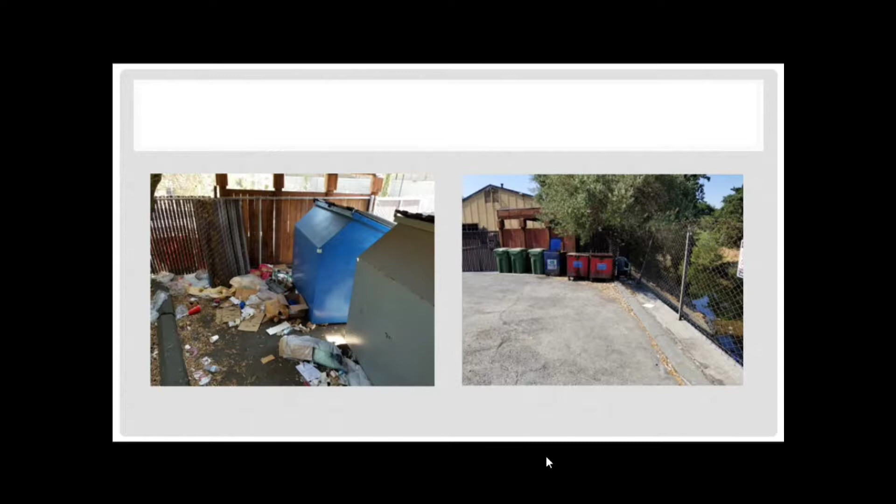These are things we see as we try to get projects through the process that we'd like to do a better job of, mostly because it's a pain in the neck for the people who operate them and for the people who use them. I imagine there's a pretty good reason this doesn't get much attention - it's back of house, nobody hardly ever goes over there, and it's probably a pain to fit everything in and get it all out, so they just leave it where it's more convenient.

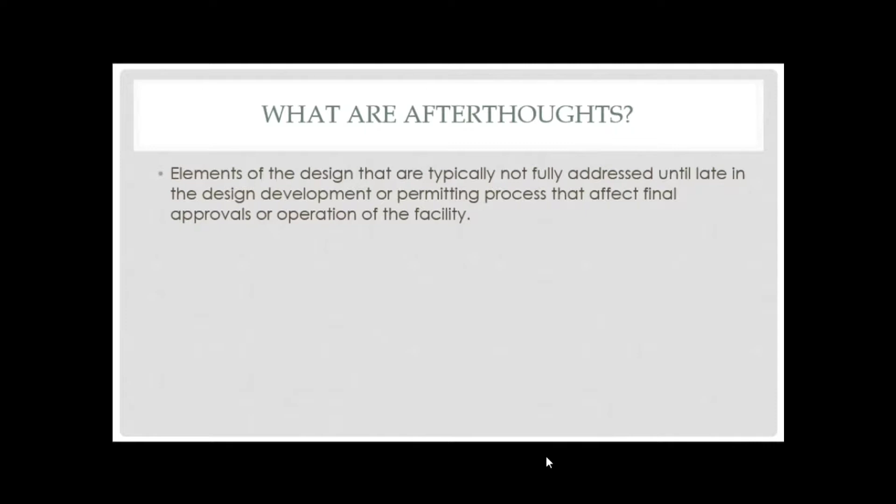So what are afterthoughts? They're elements of the design that aren't fully addressed until late in the design process. We figure we can work that out later. But ultimately, they affect the operation of the project.

All right, so what are we trying to avoid here? You'll see something later. We're in this together, but we miss stuff too, and we don't want to keep repeating the same mistakes.

And I think that's what the solid waste staff was telling us was, hey, we keep seeing the same problems over and over. We keep running into the same things where the truck drivers have to get out and move stuff around, or they can't push the carts around like they need to. But we also see where when we get back into that corner, we're being asked for an exception to the standards, or exception to code.

And we also are trying to avoid the undetermined impacts on the right-of-way, where you're lot line to lot line, and the only way to solve this thing is to put it in the street, or in the sidewalk area, or somewhere that's in the public right-of-way, or in an easement. And that can be difficult, if not impossible.

All right, so goals: share our experiences. Remember, we're all in this together. And at the end of the day, we all live with the results. If you come down and if you live and work and operate in downtown Walnut Creek, or in Walnut Creek in general, you're going to run into some of these things.

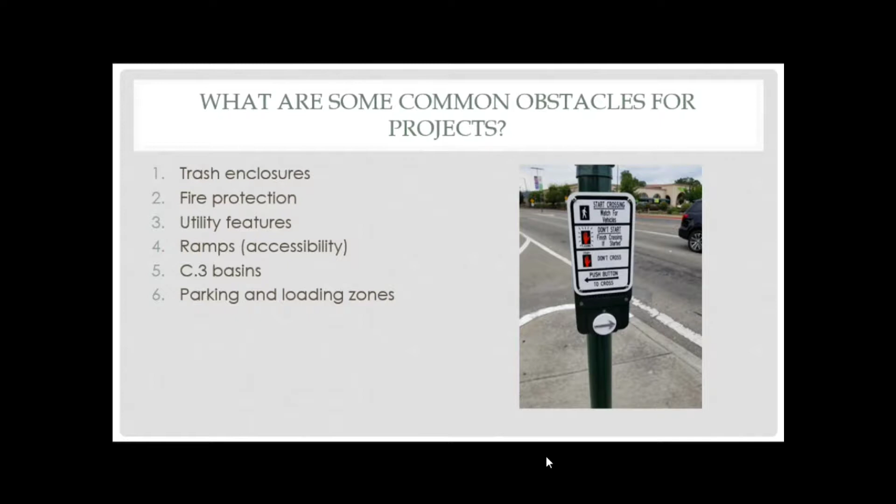And this is easily correctable. You just order a new sign. But we see these things, and we go, wow, could we have done this a little bit better, right? And if somebody's a visitor to the community, what do they see, right? So, but we also think about the safety of stuff too, right?

So, trash enclosures. The biggest thing here is show us that you plan for it, that it's something that's going to work, that it's big enough, that it meets the number of tenants that you have. It's not just one little box where it's got one little trash enclosure. It only handles garbage. It doesn't handle all three waste streams.

So how many of you know that by law you have to cover all three waste streams? Yeah, right? So you have to cover garbage, recycling, and green or the compost waste, right? That means that some of those bins can get a little bit smaller, gives some businesses some flexibility. But it also means that you have to be able to fit 3 bins streams worth of stuff in.

And if you've got a multi-tenant facility, or your multifamily plus retail on the bottom, you have to count for those different streams. And often what we see is this sizing of the trash room and the trash enclosure, because it needs to be so big, eats up so much rentable square footage. It's the last thing anybody wants to deal with, and they really don't want to pay for it. We get it. And they're expensive if you have to build one outside.

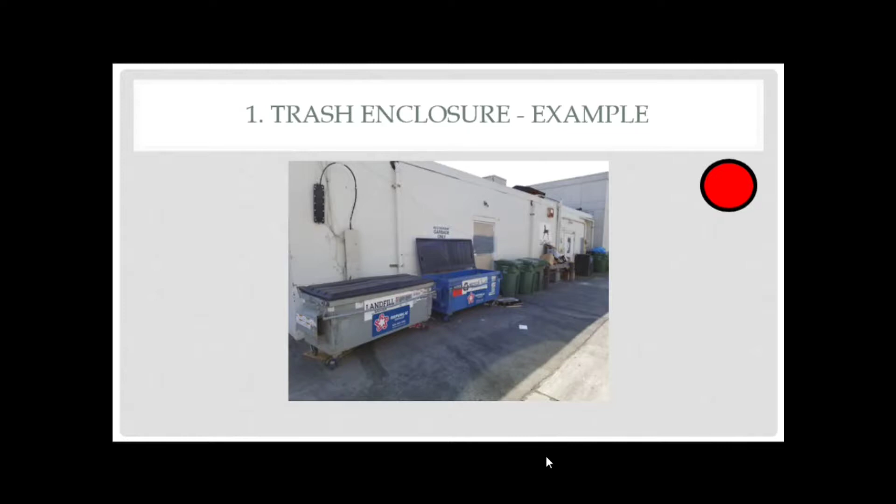So this one here is a restaurant. It's got no trash enclosure. They're backed up against some public right-of-way, but this is a challenge for those businesses and the owner with this facility. How do you deal with this much garbage? Restaurants generate the most garbage of any waste stream we looked at, period, and they generate it quickly. I can tell you more about that later.

All right, here's the one I showed you. The yellow one - at least they have a trash enclosure.

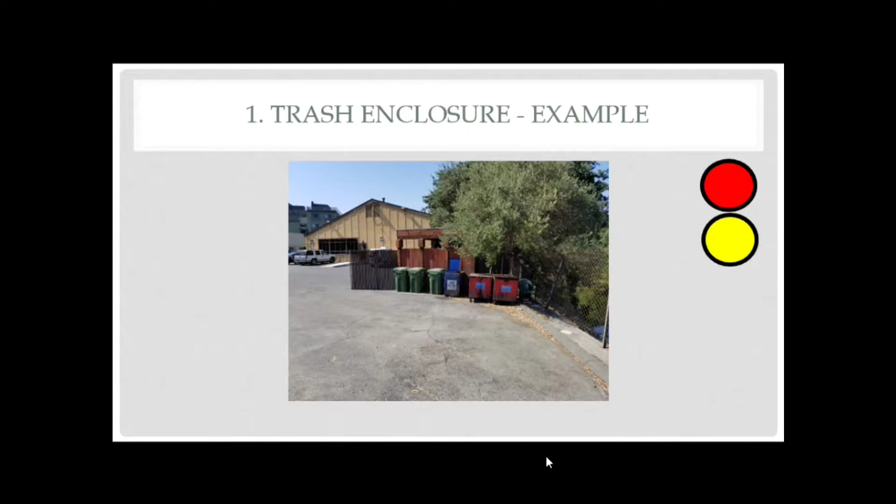All right, what do you see with this one? This is a new one. Yeah, they're probably not using it. There's a couple other things in there. Anybody got anything else? Access to it, right?

So if you can see right there, there's a little bit of a curb to that parking stall, and then there's a curb here, and that's the trash enclosure. And then there's this car - he's not even in a parking stall, he just pulled up. So how does the garbage truck get to that and roll that bin out and get it back up in there? That's difficult. That's next to impossible. That driver's going to dump that thing and drive off.

And he's going to leave it for the building owner and the operations folks for whatever business that belongs to, to deal with. And guess what - that person isn't either big enough or inclined enough to push that thing all the way back in there. And when it's heavy and full, they're going to cart it down off the curb and get it out of there so the guy can come by and pick it up maybe two or three times a week. So when we look at stuff, we want you guys to consider, as you go through the projects, this kind of action.

And oh, by the way, this is blocked by a handicap stall. What if there's a car in there? Legit, you can't - how does the garbage truck get access to it? Hopefully it comes really early in the morning.

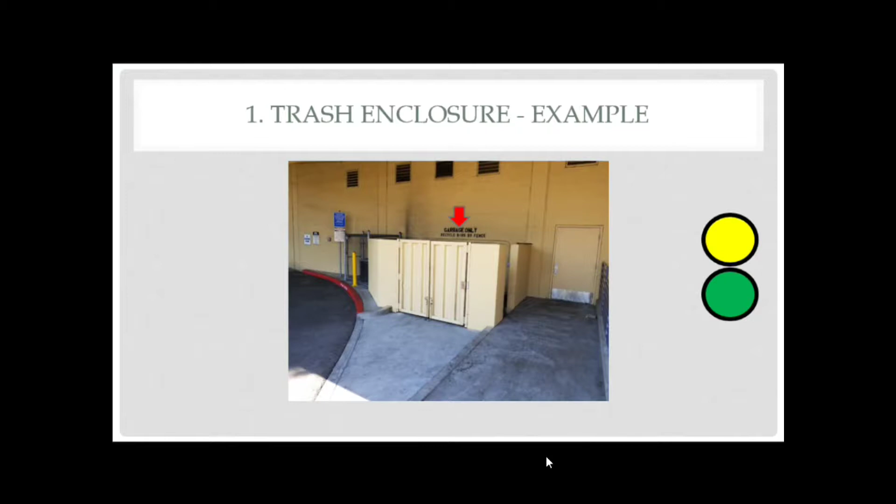They're just sitting out there. I didn't put that picture in here, because as soon as I did, you would know where it was. But the garbage enclosure is designed properly - it's underneath a cover, it's got metal doors, and it's non-combustible construction. The truck can get in and out of it, it can pull up to it. It's got some good features to it. It was nicely done, just not big enough.

So these are just some things that we notice, and we want to go, let's pay attention to that. So, on to fire protection devices.

This is something we see impacts the right-of-way a bunch, because through the initial planning phases, they don't get accounted for anywhere on the site. There's not enough room when you go lot line to lot line. And what people forget is that backflow preventer, the associated valves and elbows for the size of pipe for the fire line that goes into your building. If it's over a couple of stories, it gets to be 8, 10 inches around. That thing can get as big as 20 to 15 feet long and about 5 feet wide. And all of a sudden you don't have enough room from your building and across the sidewalk for that.

You're trying to stick it in the landscaping, and oh wait, that's in the right-of-way. We can't have that stuff underground out there because then it's in the way of the utilities and anything the city might need to do. So figuring that stuff out early, and at least allowing some room for it, is something that really has to get looked at early on in the process.

So what do we want you to pay attention to? Consider the access from the street for these things. They also have to get maintained. And landscaping features, if you stick too many trees around them, they can also be a problem, right?

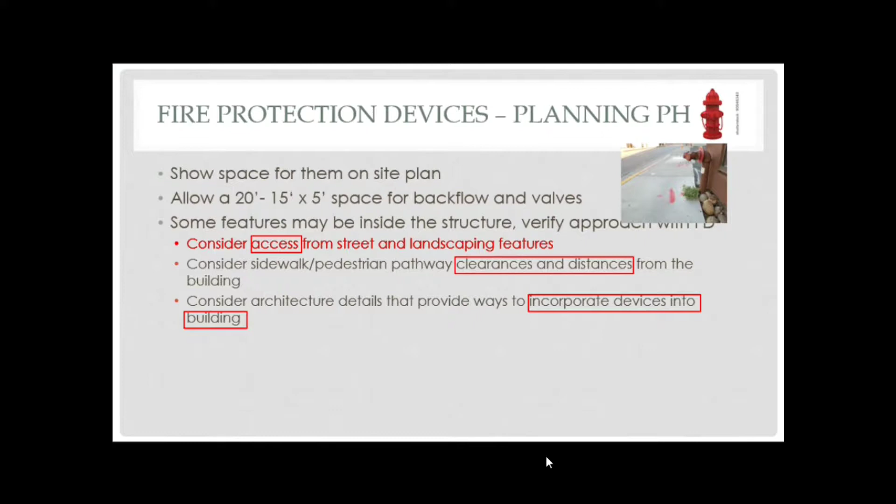And so these things stick out. You can see how that one's kind of sticking out past the sidewalk a little bit. Clearances and distances from the pedestrian pathway in the building is the other item here. And then incorporate the devices into the building where you can. There's some places where you can kind of tuck them in. You may see a little bit of that in here.

When we get into permitting, everything about permitting is going to be, give me some more detail. Show me more what we're talking about here. So I'm going to move around in the room because it's driving me crazy that I have to stand in one spot.

One of the things we've also found out is that the developer comes in and goes through the process with us through the entitlement phase. We get it all kind of worked out, and they go into the permits, they go to the fire department, and they go to the water district, and all of a sudden these things start to move around.

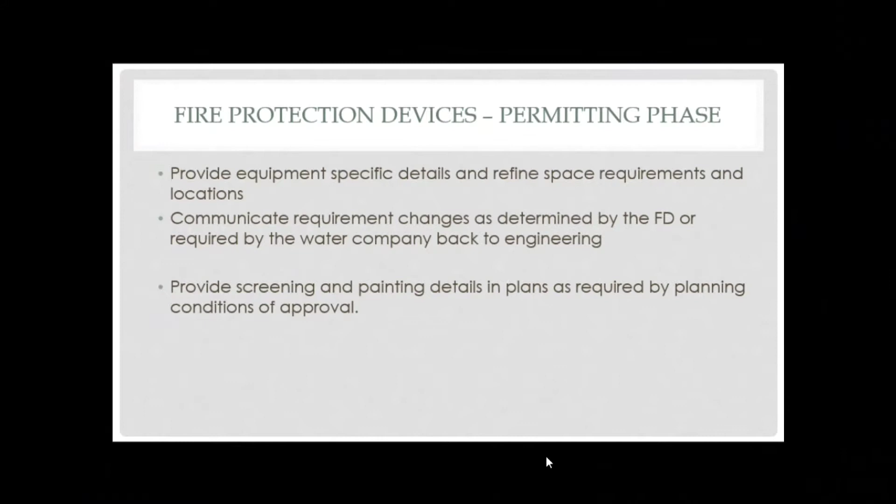And then for whatever reason, but then there's no room to put stuff back. And so communicate changes is that second item in there about when those things change. Let us know so we can figure out what the issues are. So we're not getting into construction, we're not getting to the very end, and all of a sudden we have this issue with an entitlement or a condition of approval that you can't meet.

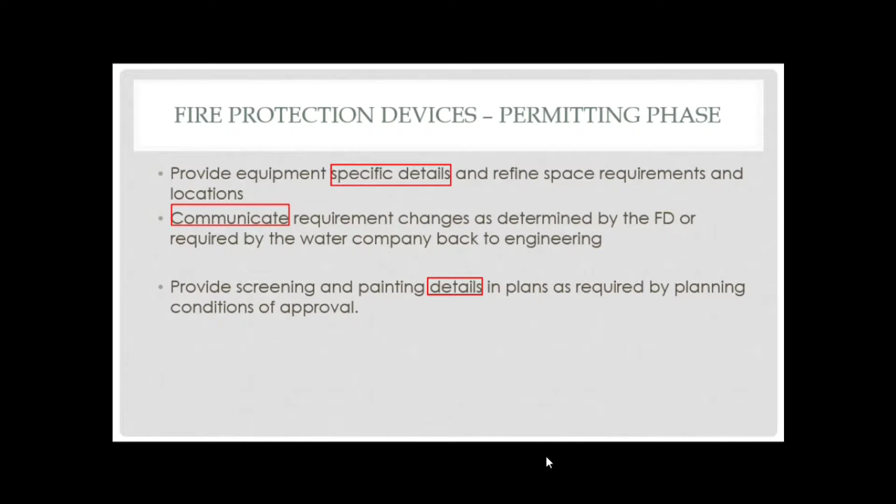In other words, the amount of landscaping that's required, where it's required, or maybe there's public art or some other interference issue with that, right? And planning always wants to have things screened and painted pretty. And I know some of the utility districts have issues with painting of these devices, that they have some requirements for how they get done. And we always want them screened or as hidden as possible, and they need to have access.

Some of them need to be in easements, some of them don't. So there's a lot of little nuances that go along with this stuff that you really got to pay attention to. And the earlier you give yourself some room to deal with some of these changes, the earlier in the process, the easier it is to deal with it. You're going to hear me say that a couple more times.

Okay, one of the things about fire protection devices: they are not optional. You have to put that stuff in. I mean, I've seen certain instances and certain uses through the building permit process where there's some alternate means and methods for some stuff, but for the most part, you've got to do this stuff in some way, especially in commercial development, and even in residential. There's residential fire sprinklers in single-family homes now.

Fire department - so we learned this with the Broadway Plaza project, and I did not put that picture in here, Heather. But the backflow preventer for Broadway Plaza initially got installed for one of the buildings right in the front of one of their key buildings in the landscaping right up against the curb, because the fire department wanted access to that stuff, and they want to be able to see where it is. They want access.

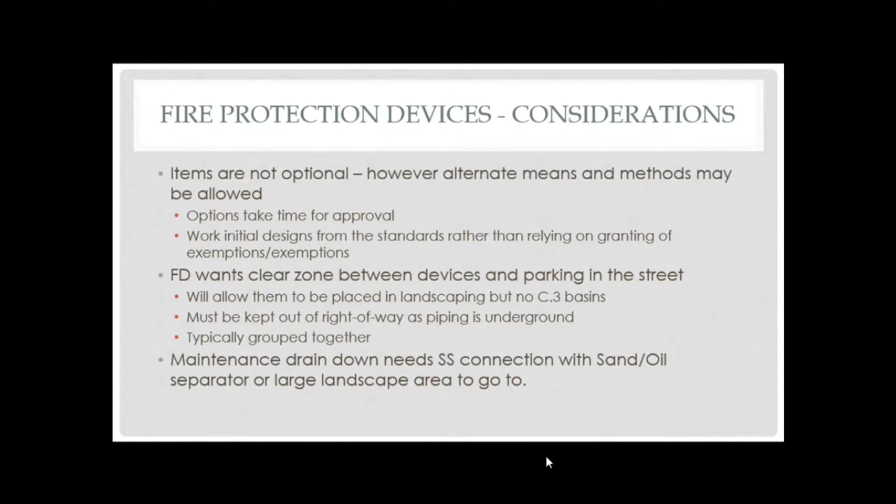These things get maintained, so once a year or so they've got to get drained down, sometimes by zone inside the building or by floor. You've got to have a place for that water to go, and it can't go in the storm drain directly. So you need enough landscaping area for that to pond up in, or you need some connection to the sanitary sewer system, which they're going to want to know about and locked out, and they need to be notified when that happens. Central San is in the room, so if you don't know, you can ask them specifically. You have to work those things out and work them into your plans.

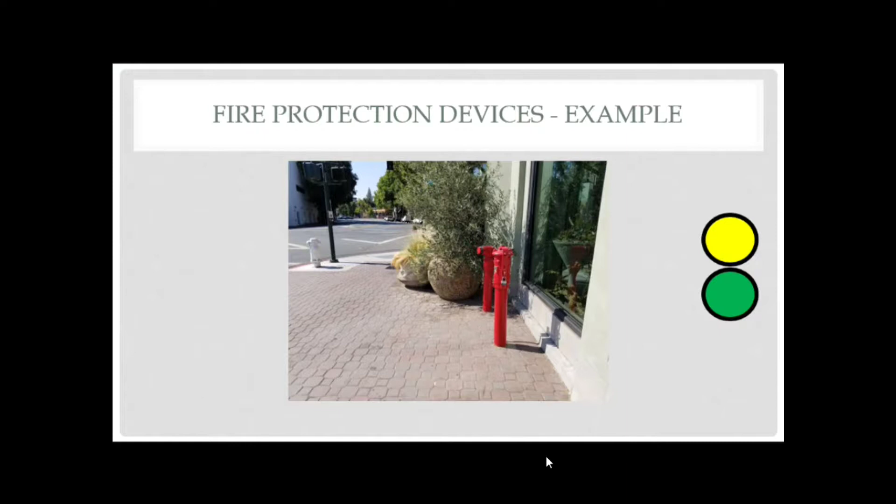And then you can see out on the street the public fire hydrant, they're white here. Okay, so this one cracks me up every time I see it. It's in the landscaping, kind of nice and hidden. The fire department actually doesn't have any issue with this because they can get access to it. These are those post indicator valves and the FDC.

Somewhere there's probably a backflow preventer that's pretty large somewhere. This is in the right of way - it wasn't intended to be that way. The project was all designed with it out, but when it got all the way through the process, there's a dedication of everything from the curb line. This is on Locust, so everything from the curb line out was all public. Everything from the curb line back was initially not, and so this is back behind the curb line in the landscaping.

But then they came back and dedicated it, and so this ends up in the right-of-way. And I always get, well, you don't want us to put it in the right-of-way, but that's in the right-of-way out there. You're right, it is. It wasn't designed that way, but by some action later, that's what happened. So apparently we accepted some of that risk, right? We might have not done it knowing really.

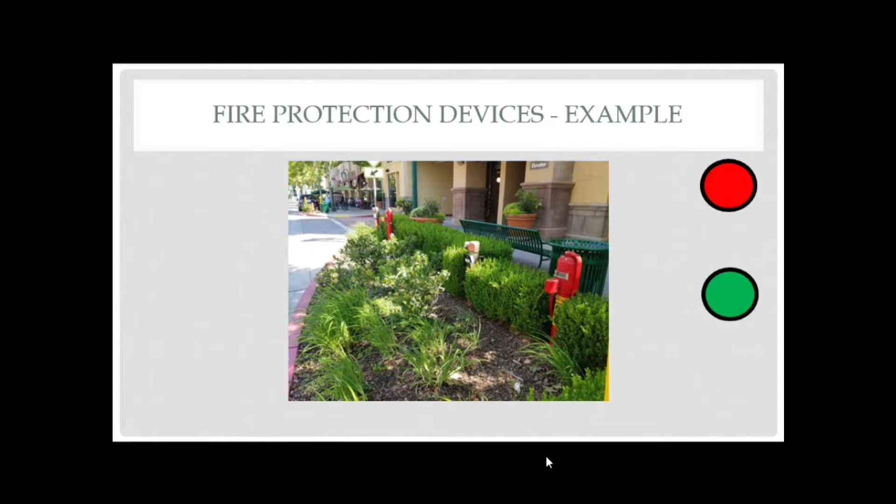So who pays for it when this stuff has to get moved or changed? The utility has to come through there, we have to change the street. Who pays for moving that fire department connection? What happens if it breaks? Who pays for the damage? That's the kind of stuff that we really do think about. It's really about the safety and the impacts to the public when we're telling you we have an issue with some of these things. In general, we want to hide them and tuck them away as much as you do. We want them to operate seamlessly with everything else. But we do think about who's responsible for this thing. And this is what bugs me about that one.

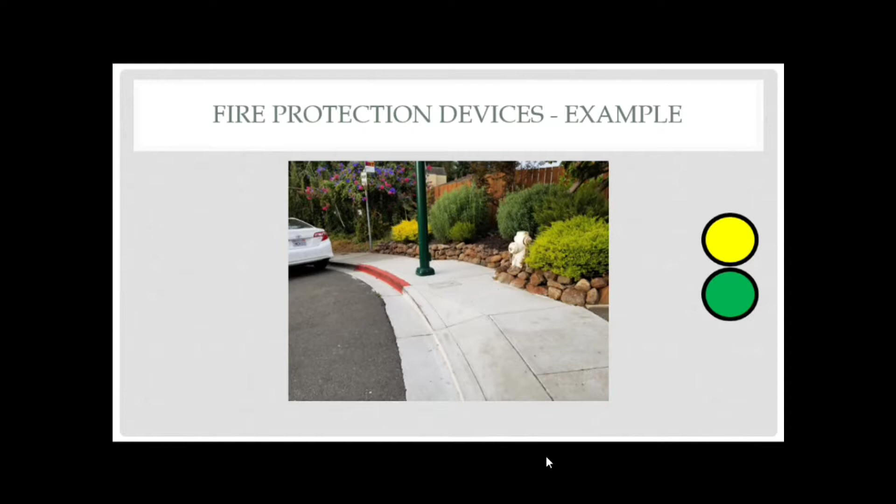This one's not bad. It's a little awkward because you have to walk past the driveway, which needed the ADA path. You've got the fire hydrant. Could the fire hydrant have been moved to make a smoother transition? Probably. Could that light pole have been adjusted some way to make it easier around that pathway? Maybe. Is it 100% wrong? Nope.

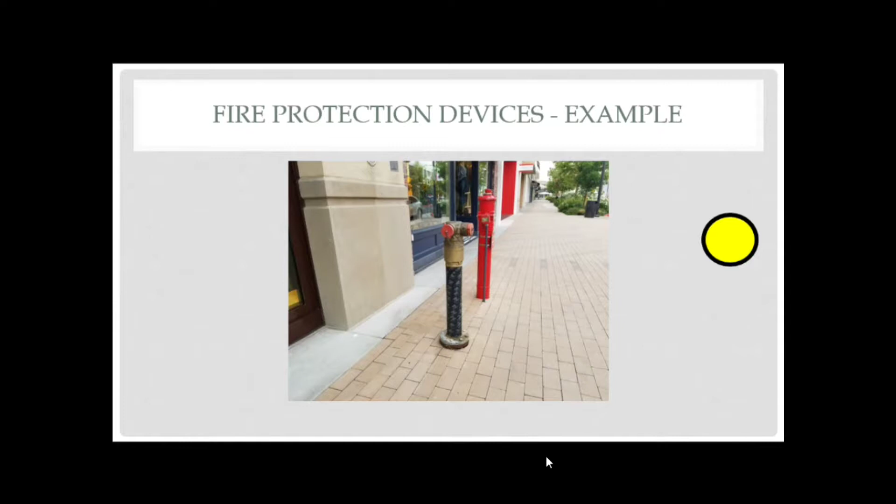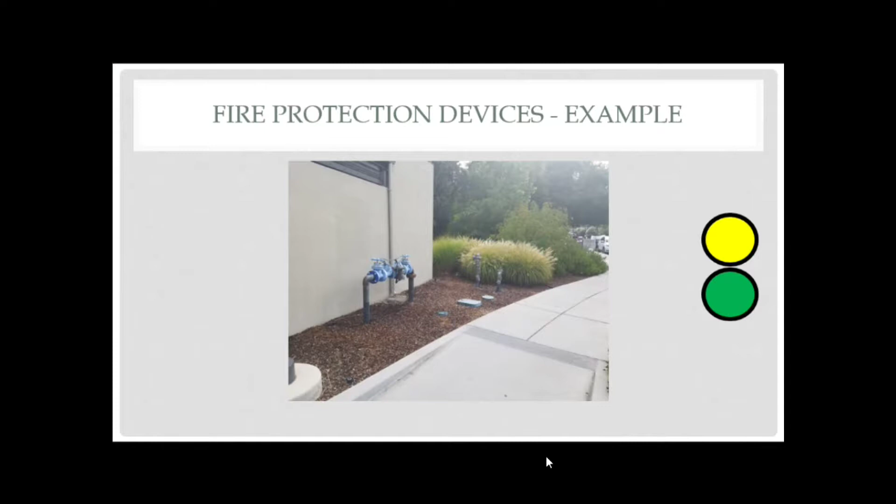All right, this is not bad. This is actually at the library, I'm pretty sure. This may not be the fire department connection, but it gives you a sense of how big some of these backflow preventers can get. That's actually a fairly small one. And then here are some of the irrigation valves and backflow preventers for the irrigation. The irrigation ones are fairly small. Okay.

Anybody got any questions so far? I'm doing a lot of talking and I'm not getting a lot of interaction. All right.

Utility features run a whole gamut of stuff, but mostly we want to make sure - one of the things we see often that gets messed up is that they don't always get shown on the drawings that the architect's working with. Not all the features are turned on, not all the stuff got surveyed. It's not available to the MEP. He can't necessarily tell where some boxes are, or the civil can't see everything, because it didn't all get picked up. So that's kind of a big deal.

And then utility rooms - it's just like trash enclosures, you've got to give up rentable square footage to get that stuff in there. But if you've got residential above and you've got 50 units, you may need 50 separate electric meters or gas meters too. And PG&E has a green book that has a standard for how much space you need per meter, and guess what, that can get quite large. You can combine some things, but if people are going to pay their own utilities, like in a condo project, you need to have room for that. We see that get kind of sideways as well. Now a lot of times the developer will work that out inside the architecture, but sometimes it'll come outside a little bit. All right.

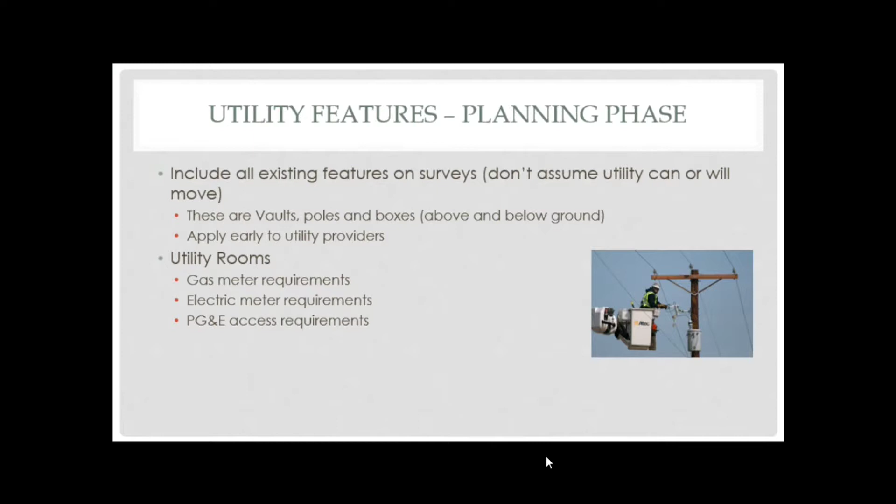I can't emphasize this piece enough: apply early to the utility districts. When you have utilities, apply early, very early. Get their requirements, go talk to them, talk to them at the counter. Show them your project, because the design requirements can drive a lot of things about your project. PG&E can take as long as 42 weeks - it's almost a year just to get through their process. And that's if you turn stuff around, because they have that much of a backlog. You're 15 to 18 weeks if you miss your construction schedule - you go back to the back of the queue with them.

Just because of how busy they are. And then when we get into fire season, they get even busier because they have to deal with all the power pieces. They pull crews out of construction to go fix all those transmission lines and other things affected by a lot of the fires in California. So PG&E has a very big job, they've got a lot of stuff going on. And on the backside, when you get it all ready to get scheduled, if you get outside of their schedule, you'll go back and it'll just add to the sequence. So getting in there early, getting it all coordinated, and getting it to us so we can see there's not other interference with the other utility pieces is important, and that it all fits.

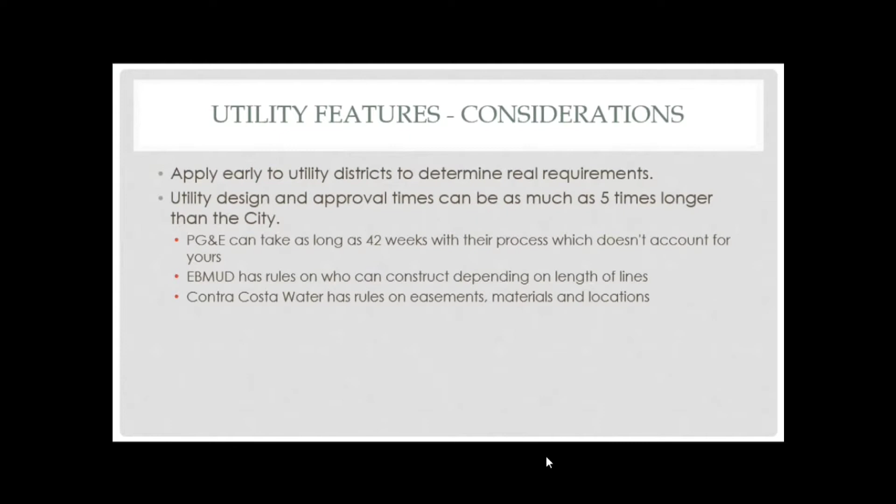That's a relatively recent change, and I think that's in the past year. Is that right, Rachel? Late 2016, there was a rule that got changed, and that's true for all the water utilities.

That can affect where your connection points are. If you're thinking that you can get the clearances and get over top of it with one of those gravity utilities because that water line's deep enough, you may not be able to. You may have to go the other direction, or find another connection point.

I will say there's an exception process through the state, if we can demonstrate that it's not feasible, but it's time consuming. So to your point, planning ahead - it is a little bit of a change to the design, just assuming you can snake the water wherever and get the gravity facilities figured out.

If those of you in the room haven't met Rachel - Murphy is the Director of Engineering for Contra Costa Water District. Thanks, Rachel. So getting in with utilities early is a big deal.

Okay, I have a question. Sure. We had experience when we were doing a project and we had - hold on, offsite, hold on, I just want to get the mic. I'll make sure the question is on the record.

We had offsite conditions and we shared a cost for some light standards with the city. And so it was on the engineering drawings and all that, and we knew what the budget was. But as we got into it, the USA - I mean, you couldn't put the light standard there. So then all of a sudden we're moving to another spot. And then that wasn't good, and we're moving to another spot. And the costs seemed to all went to us because we had a shared agreement. And the city said, well, no, this is our maximum cost. And it seemed, just looking at it, was unfair.

And no one could figure out how you could have taken care of that beforehand, because as you do urban development, those streets are full of stuff and you can't figure out what to do until you actually open it up. So I don't know how to resolve that, but it's certainly something that we experienced, and it certainly affected our bottom line. Thanks for that, I appreciate it.

It is a challenge dealing with the utilities. You'll often hear us say, hey, have you potholed any of these spots where you have potential crossings or potential things going in? We'll ask you to pothole early in the process, not necessarily an entitlement process, but as you start your permitting process, we're going to ask you if you potholed for the design. Because sometimes you need to get some better fidelity on where some of this stuff is. And calling USA to get some of that information for potholing has saved a couple of projects.

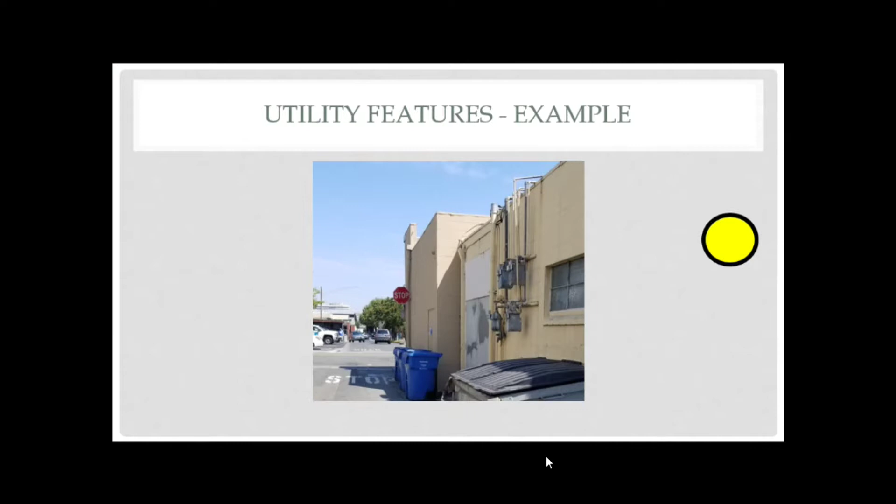It's probably in the right of way. We probably said, you got no other choice, we're going to let you do it, but really, it shouldn't be there.

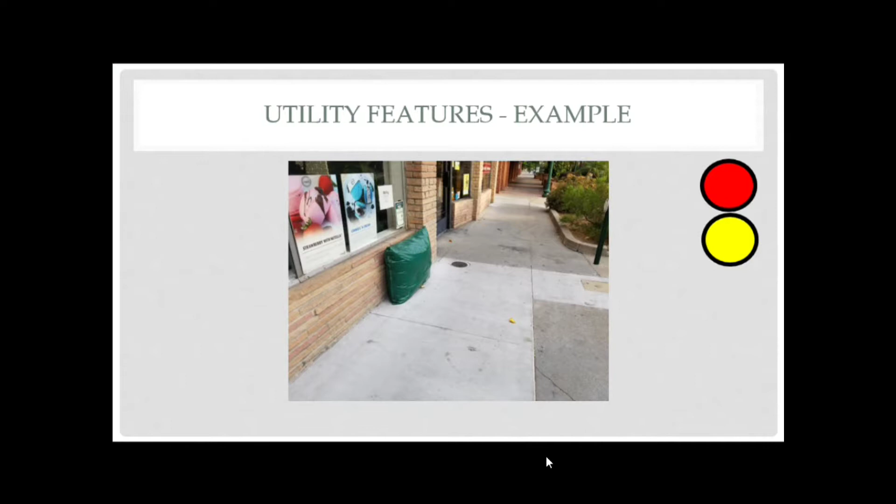When I see this one, I go, hey, this is a true example of an afterthought. Whoever designed the building or the MEP didn't realize or tell anybody how big that manifold was going to be for the gas. So as they got to building it, whoever came along said, we should probably put these little posts here to hide it, because otherwise people are going to smack themselves on this meter and the associated piping. So it was probably just shown on the plans as 'this is where the gas connection is,' just a note, not really how big it is. That's something we see and go, yeah, that could have been done a little better. Maybe that piece could have been tucked in, maybe there could have been a different configuration talked about earlier in the process.

Alright, ramps - I'm going to skip a little quicker through this. When you're doing ramps, you need more survey than lots of times you get. So if you get survey early and don't get enough to do your ramp design, you're going to have to go back in permitting to get more. The ALTAs usually pick up a lot more survey data than just calling somebody up and getting a planning level survey. But at the same time, you have to communicate how much detail you need so you can know where the property lines are, because it can matter whether those ramps are in the public right of way or not.

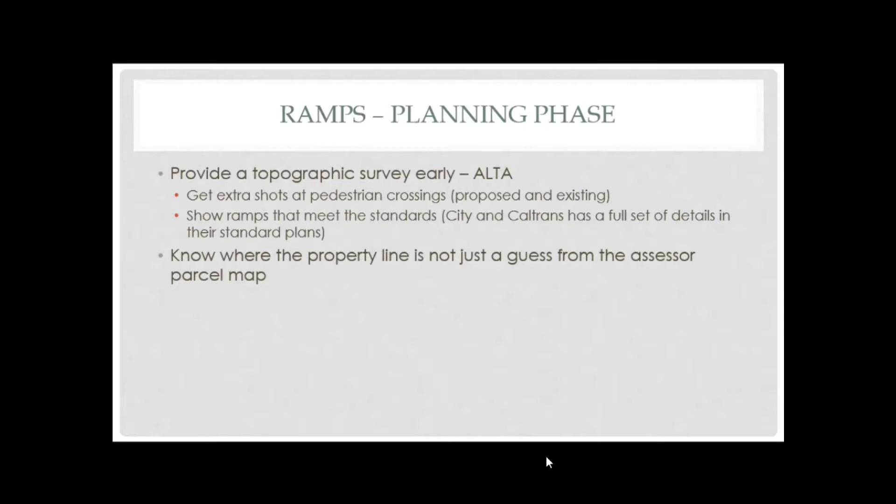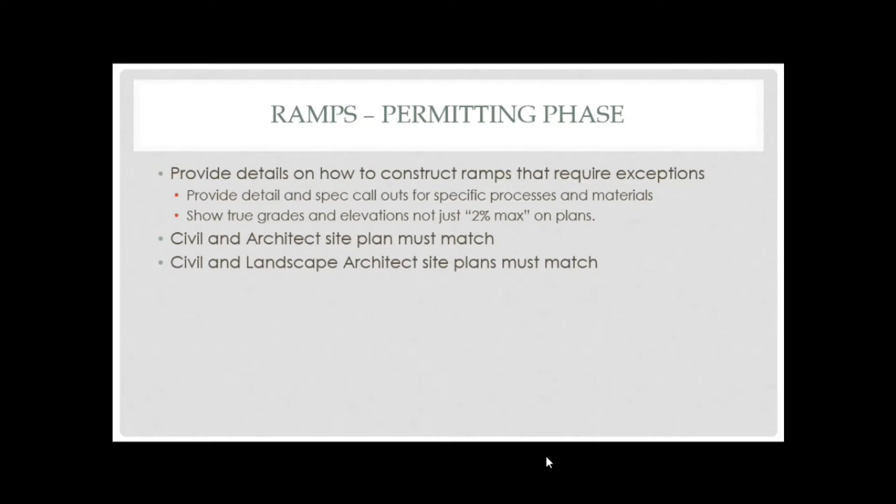Details - we're going to want to see details when you get into permits. We're going to want to see the civil and the architect site plans match, and we're also going to want to see the civil and the landscape architect's plans match. Sometimes we see one but not the other. Sometimes we see the architect and the landscape architect match and the civil is 90 degrees off. So we work through the permitting phase to get that lined up. The better job you can do with that, the better.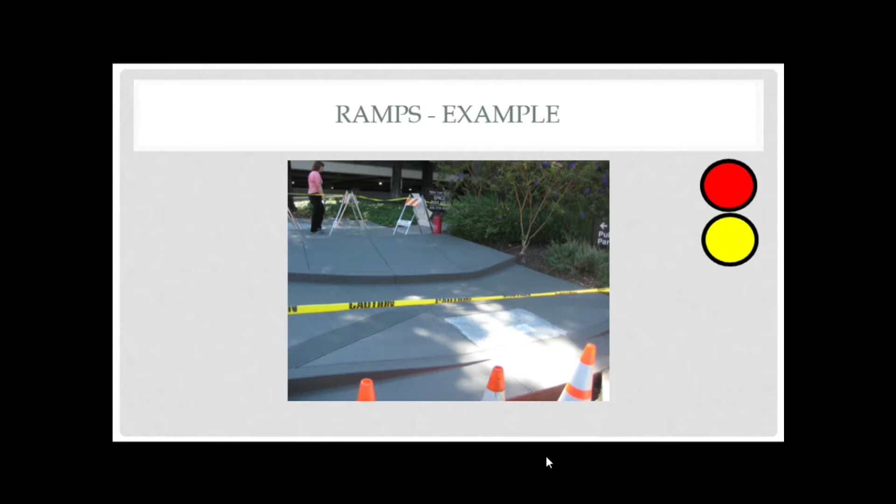It's just because they couldn't make the grade up from one place to the other, and there was already some concrete, and they needed a landing, and so on. Stuff we want to avoid. The yellow is because this piece of the ramp is installed correctly. At least they have something, but that curb right there is a pain in the neck, and I think it's outside the right of way. We kind of went, it's not a good idea.

Okay, basins. This is a C3 basin stuff, and like I said, we can spend entire days just talking about all the details on C3 basins. I'll tell you that one of the things we really look at is, do you have the right size? Did you allow enough room for it, and give yourself enough room to make mistakes or to have stuff move around or encroach into it? You're going to see a little of those pictures. And keep them out of the right of way, and then keep them out of easements.

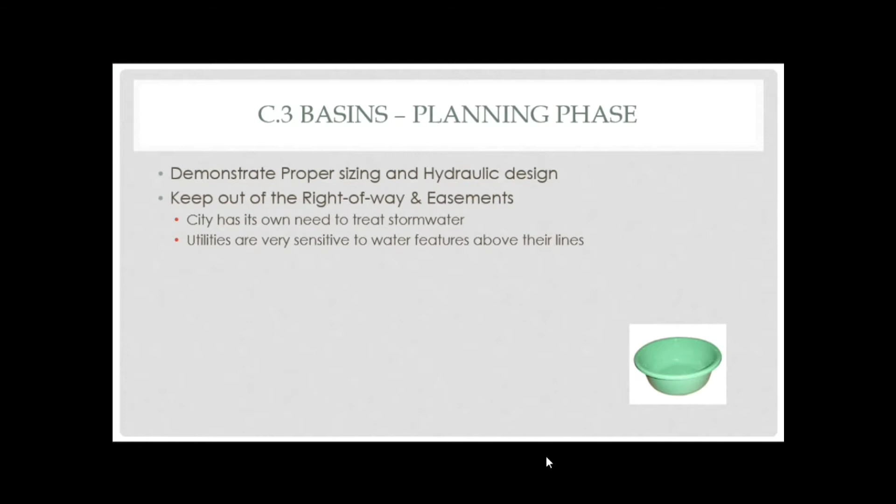So a lot of times we'll see where some of these things get planned in and they got to go where they got to go because it's gravity fed. But nobody plotted the easements or got all the easements out of the title report, plotted them on the map, and now they got to get moved because they're in Central San's right-of-way or easement, or in one of the water districts or PG&E's, and they don't want it there.

For these C3 basins, we're not looking for you to create really big, deep things, but we need to detail these things out so that they're specific to what you're trying to do. And the detailing is more than what's just sitting in the guidebook. It's being specific about the grades that are around it and what you're trying to do and what it interfaces with and what's right next to it.

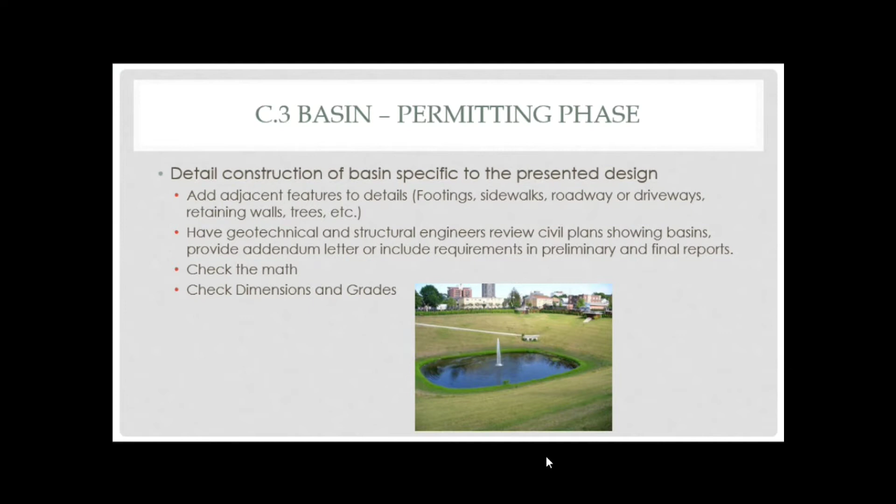And check the dimensions. You don't want to spend an entire time trying to QA your drawings either, right? You want to get through plan check fairly efficiently. I don't have enough time to completely QA your drawings, and when I do, I'm going to find stuff, but you should do that too.

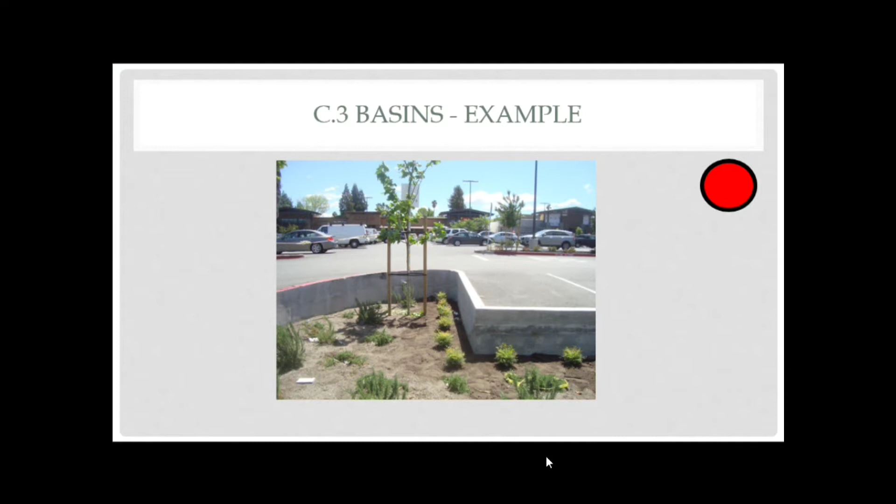And it's just, if you're in this parking spot and you're a passenger and you go to get out, you got no place to go, right? Can you see the C3 basins in this one?

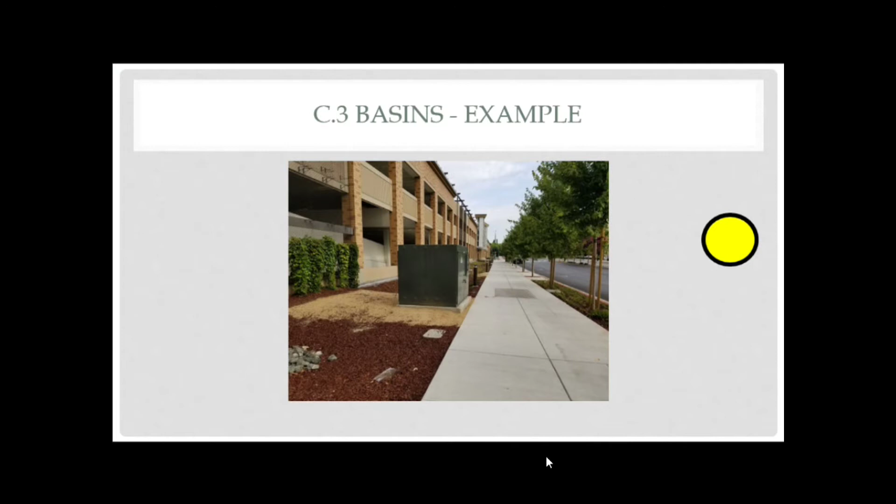When they came in for the design, the basin went behind it, and it was included in their area. If you've done any of this design, you know that you're fighting for every square foot of space, and you have so much you have to do that this caused a little bit of an issue trying to figure out whether or not the basins were still going to work for the drainage calculations. So just because they missed the requirement, PG&E goes, you're going to give us space all the way around it, go figure out how you're going to make your drainage work. And this was late in the process.

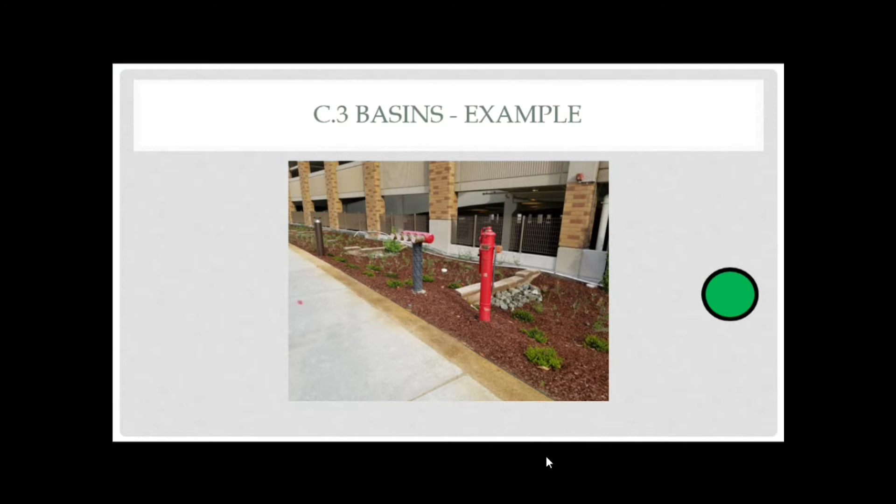What about this one? So this is good in that these are sitting on the edge. They're not in the basin itself. They're accessible, and they're not off. They don't impact the sidewalk. This one's funny.

The owner of this project is doing it by himself. He's a registered engineer, works for the state.

I'll just tell you the two things. This is something sitting over top of the inlet, and we don't want any of that to happen. But you see this undermines the sidewalk. He didn't catch the grades correctly. And so that's the way they got undermined in the sidewalk.

We see this all the time with basins right next to the sidewalk or next to a building, and you didn't think about how deep the footing was. So adjacency is an issue with these.

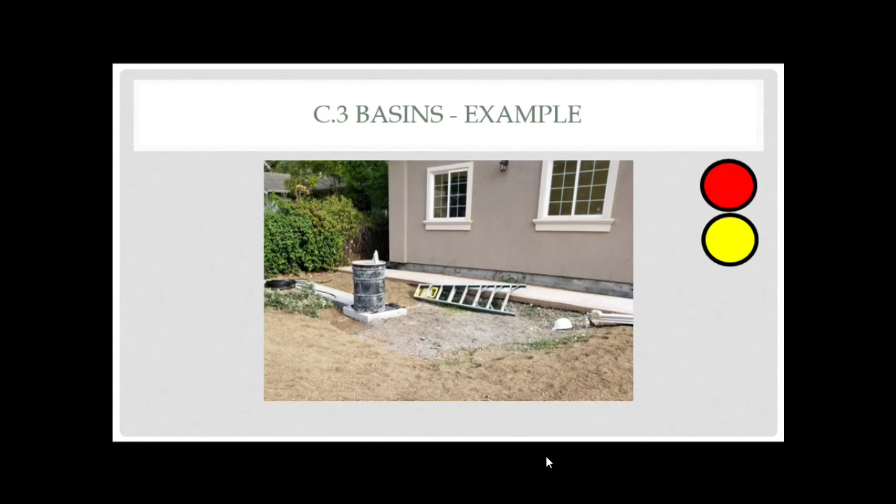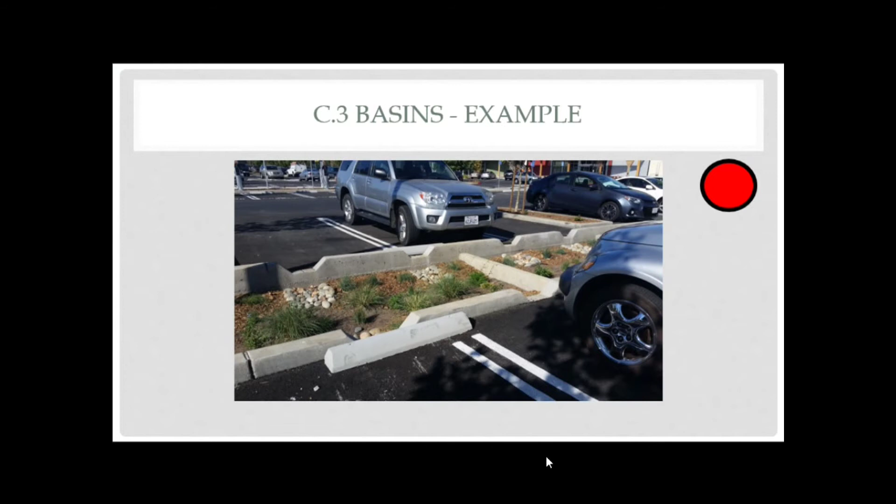Not on my project that I designed - it was consultant designed. They function, except for, this guy right here blocks, that guy there blocks, but you know why they put those in there? Because see how the striping's lined up? If I pull in the spot, I could drive right through there if I pulled forward. If I put in the wrong gear or I rolled forward, my car would end up in that basin, and that's happened to a few people.

All right, parking and loading. Now I'm almost done, this is the last one. Demonstrating on the plans where the parking and loading occurs. Use real dimensions. It's kind of a pain in the butt to go through the process and then find out that you don't really have the room that you thought you did.

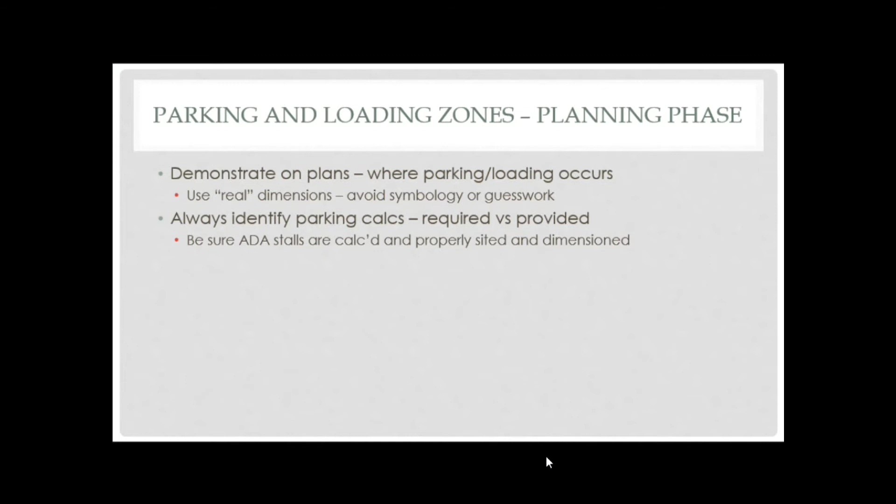Identify required versus provided, and adequately pay attention to the ADA stalls. I put this up in the slideshow because I want to make sure it gets out there. It seems like not a lot of folks have access to this. We get asked for it a lot. It's the off-street parking standards, and right there at the bottom is a reference to where it is in the Muni Code. These requirements come up in Title 10 in the zoning regulations. That's where a lot of these parking requirements come, to include dimensions.

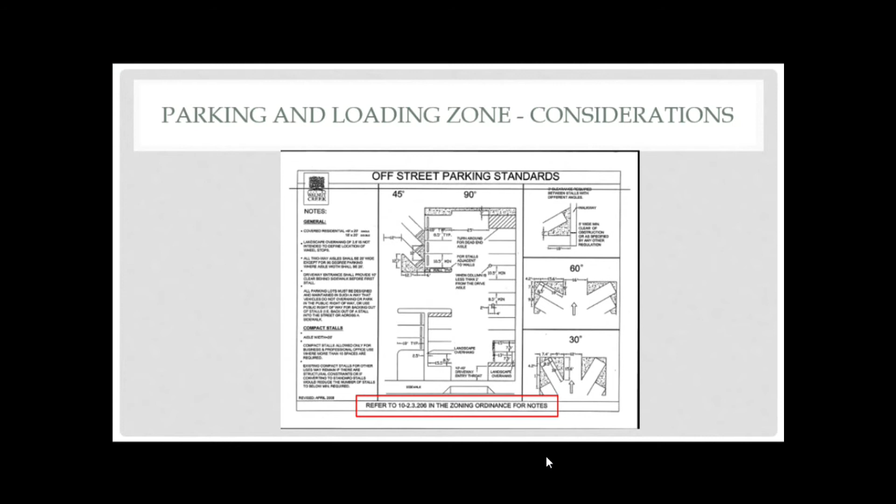Something else I want to highlight here. I was asked what's really wrong with this, why is this red? Just similar to the other example. People come around the corner there and they drive in. You see these things allow water into that basin, but people drive into those things all the time.

They cut that corner too short on that right-hand side of your car. If you cut that corner too much, you're into that curb. And if your wheel catches inside that opening, you're in that basin before you know it. So it's the adjacency. If that basin was stepped back from that curb and it didn't require - and oh, by the way, these are expensive because those curbs are all retaining walls.

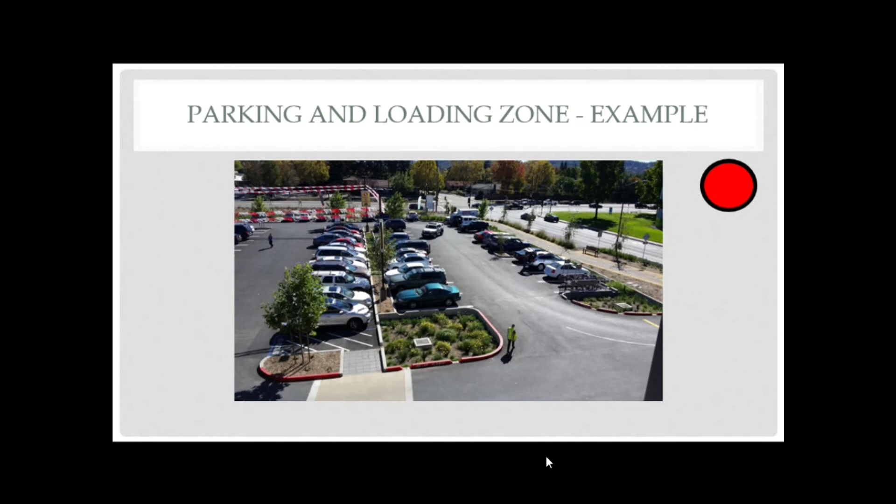Those things are all retaining walls that are 3.5 feet tall. Those are expensive. So if you just step them back, gave yourself some room, they could just be curbs, which are a lot cheaper, and you don't have the issue of having cars drive into them and not being able to get them back out again. But every one of those curbs are that.

So this is down Commercial Lane, a popular restaurant area, and this is what happens most of the day. Can't do much about it. Commercial Lane is good for that, at least. But you can see there are two people trying to make deliveries. This happens all day long, every day.

Figuring out how you're going to load your job, how you're going to operate it, the deliveries that happen when you have commercial associated with your project is something that really has to get looked at and discussed. It's a pain for everybody. And I mean, do we want to have all these businesses in here?

Absolutely. Are these great restaurants? I love this place, and I'm glad they're here. But boy, I'm glad I'm not the manager having to operate all of that and deal with the complaints and getting everybody in and out of there, right?

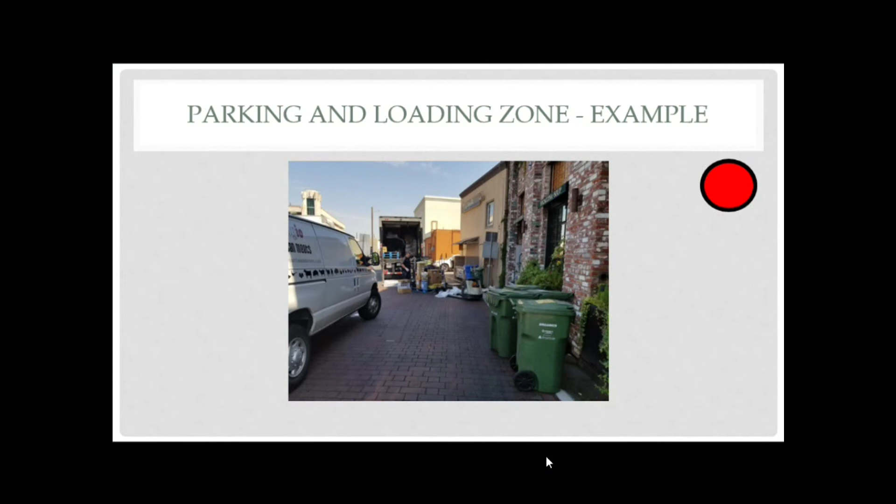So as we go look at design features, as we try to do a better job of pulling projects together, these are the kinds of things that we think about, we're going to bring up, and we want you to see early so we can discuss what those impacts really are.

Okay, some final thoughts, and this is kind of what I really want you to remember: leave yourself some wiggle room. When you're on a project going through the entitlement phase, leave yourself some room for all this stuff to occur. It's really important that you give everybody, as they tighten up the process, some room to make adjustments, and give the contractor room when things don't exactly fit or get exactly built, because their tolerance for building stuff isn't a Swiss watch. They're digging stuff with a tractor.

Okay? So if you can't get it accurate to somebody driving a tractor, then it's too tight. So give everybody some room. And then think about some of these things earlier in the process. It'll really help make everything go smoother.

Okay, I've talked a lot. So, anybody got any questions?

Yes? I just have one quick comment. Ethan's going to run a microphone over to you.

So, thank you for a great presentation. I mean, these are things we think about a lot because of our experiences. Trash enclosure and trash pickup is a huge one I've experienced, and the fire department connection stuff is a big headache as well. Yep. I find, particularly on the fire department connection, that we use a design build contractor to prepare those drawings. That guy's not on board until late in the process. So part of the reason why we always have this issue is those files just aren't available. And we're working, I think, better to try to guess where those things will go to help that process.